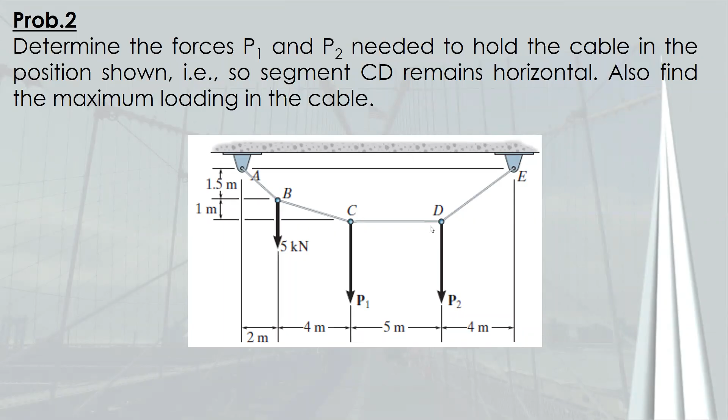Sige. So, these two case na sa previous na problem, we were able to solve for the reactions kaya ang forces ato given man. In this case, dili ta pwede. You cannot sum up moments of support and then solve for the other reaction because two forces are still unknown. Di ba? So it's useless to solve for the reactions.

So our focus now on this is on the joint with the known load. In this case, it's B. So, didto ta mag-focus sa joint B. Unknown ang tension sa AB o BC. Makuha mo na to ang direksyon na ni. Kaya given man ang slope o, 1.5 is to 2. And then, ang BC is 1 is to 4. So, with the given slopes, pwede ta mo-solve sa tension AB and BC. No? So, yung na ni siya.

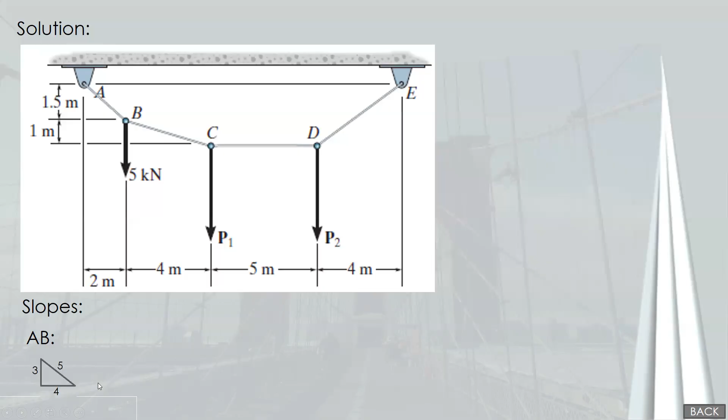First, kuha na to ang slope para diretso-diretso na. No? Sige. For AB, 1.5 is to 2. Kung whole number, that's 3 is to 4, diba? 3, 4, 5 siya nga triangle. Okay? Remember this. For BC, 1, 4. 1 vertical, 4 horizontal. And the hypotenuse is square root of 17. CD is horizontal na yun, no problem.

For DE, 2.5 vertical, 4 horizontal. So kung i-whole number, times 2 na siya. 5 is to 8. No? And hypotenuse is square root of 89. So every time mag-solve ta, mag-consider ta og joint, kanat ang gamit ha. Always remember the slopes. Sige.

For joint B, we have these forces. Now, tension kita na. Okay, cable man, dili mo design for compression ng cable. So, 5 ne, and then tension BC, tension AB. And then slope din ka. That's the slope for AB. Automatic 5 na. And then for BC, 1 is to 4 and then square root of 17 na.

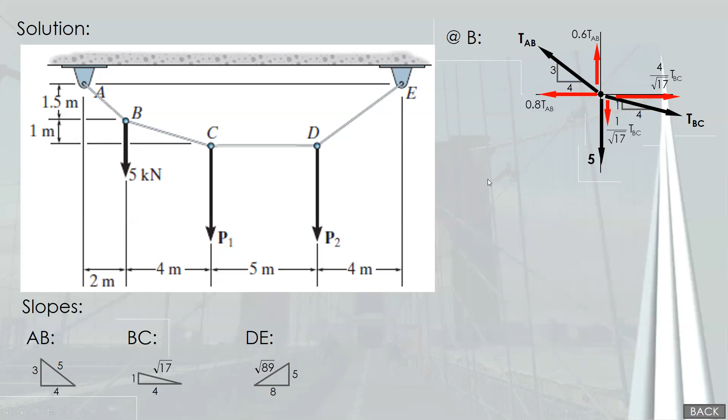Okay, so let's resolve the forces into components. So this one, that's 0.8, 4 over 5. And then the vertical component is 0.6. While for BC, that's 4 over square root of 17. And so vertical is 1 over square root of 17. And then sum up the force sa X. You have two forces. This one, no? And then for Y, upward and downward. So we have two equations with two unknowns.

Now, if you solve 1 and 2 using elimination, substitution, or calculator, when you use your calculator, be careful sa placement sa terms. No? Like for this one, BC ang una, and AB ang next. While dire, AB ang una, so you can interchange. Negative ang una, negative TBC, and then ang TAB. And the result is this. TBC is 10.308. TAB is 12.5 kilonewtons. Okay.

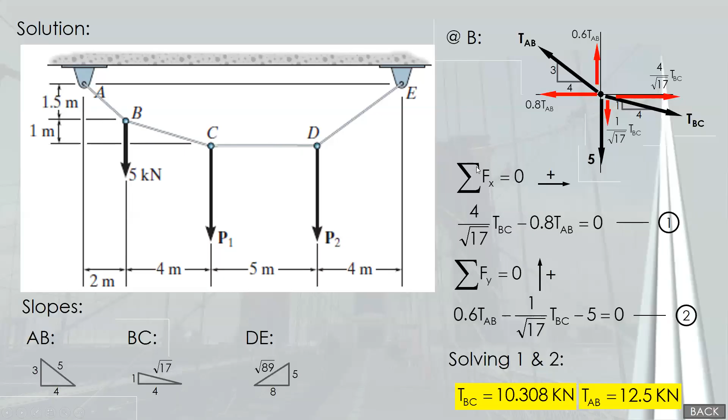Okay, so after this, nanakay TBC, di ba? Okay, you proceed to joint C. So, mo ni mong BC ha? And then CD is horizontal man. So, duha ang unknown. Tension CD and then P1. Okay. Use the same conditions. Summation of force sa X and Y.

So, kana, that's tension BC. And then, mo na slope niya. Mo niya components, 10 and 2.5. Okay, so sum up the force along X. TCD is equal to 10 kilonewtons and summation of force of Y. We now have the value of P1, 2.5 kilonewtons. So after this, proceed to D. This one, no? Nanatay CD, R na butas DE. So we have these three forces.

10 na siya. Tension CD, 10, 10, and then DE. Remember ang slope sa DE? 5/8 square root of 89. So, gana, and then components.

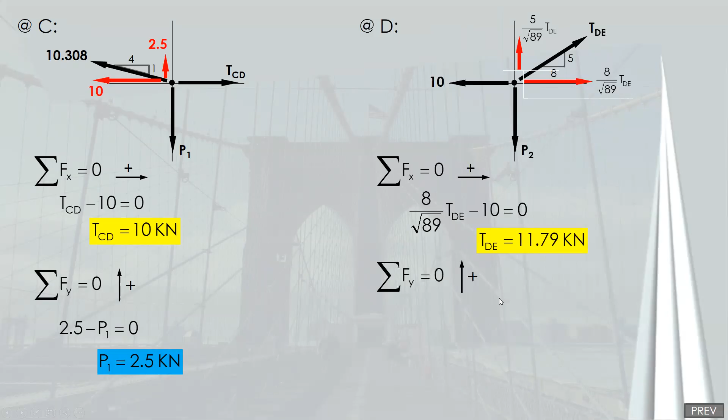Horizontal and vertical, and then sum up the force along the horizontal, and you have tension DE, and then summation of force of Y. You can substitute the value of DE. And na P2. So na-solve na ang values of P1 and P2 and the maximum loading, meaning maximum tension experienced by the segments. So ang CD is 10, DE 11.79.

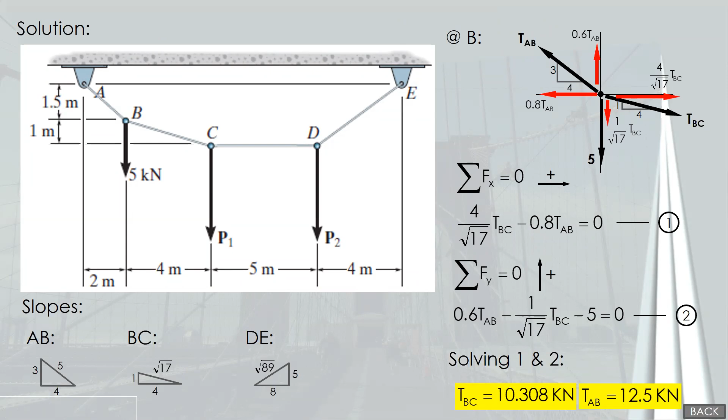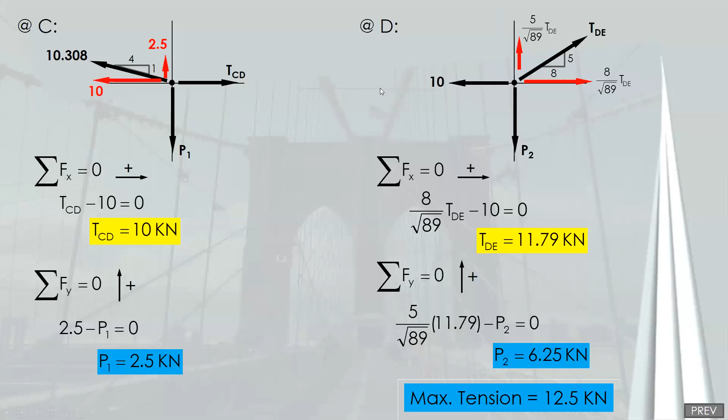Okay, BC is 10.308, 12.5. And I think this is the maximum, no? 12.5, the biggest one. Therefore, the maximum loading is 12.5 kilonewtons. Okay. So, ang pag-analyze sa cable with concentrated loads, dili siya procedural. You must look at the conditions and then kung ano saan given.

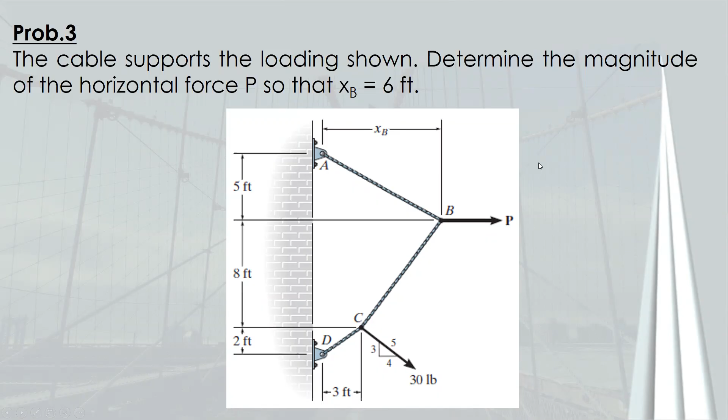The other problem is this. The cable supports the loading shown. Determine the magnitude of the horizontal force P so that XB is equal to 6 feet. So, kung 6 ni, okay. What's the value of P? No other condition, ha? Okay, sige. We'll replace this one by 6. So, like this, na 6 feet na.

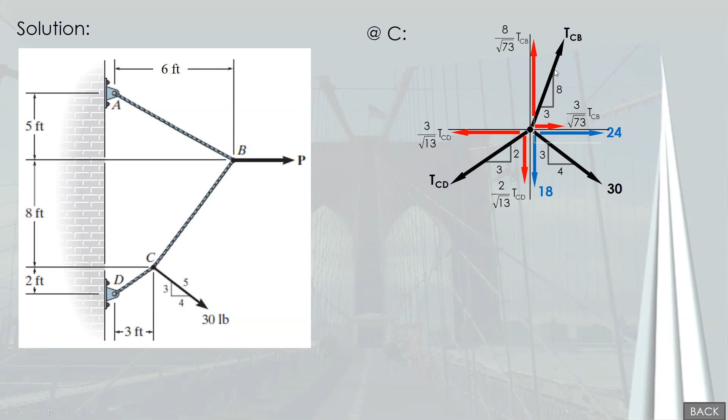So, like this, no? 24 kay 4/5 man, di ba? So, ang horizontal component is 0.8. 4 over 5 of 30, that's 24. And then this one, 3 over 5 of 30, that's 18. And then this one, horizontal is 3, vertical is 2. And then CB, horizontal is 3, square root of 73. Sorry. Three over square root of 73, and then vertical 8 over square root of 73 TCB.

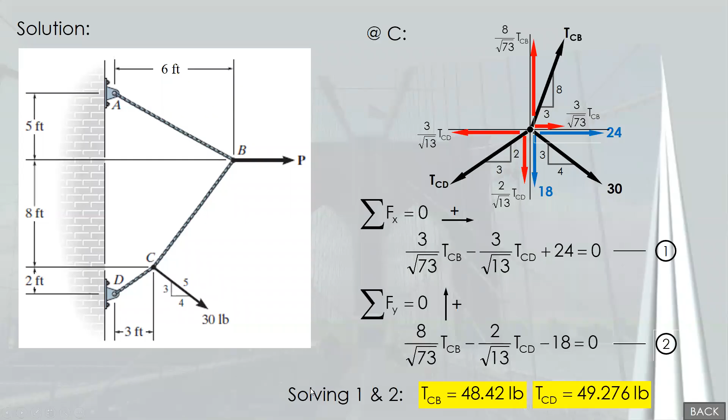And then summation of force X, 2 unknowns, summation of force Y, 2 unknowns again, second equation, and then solve equations 1 and 2. You can use your calculator, and you have these values, TCB and TCD. So you now have the value of TCB, no? TCB. You can proceed to joint B na naman kay value ani.

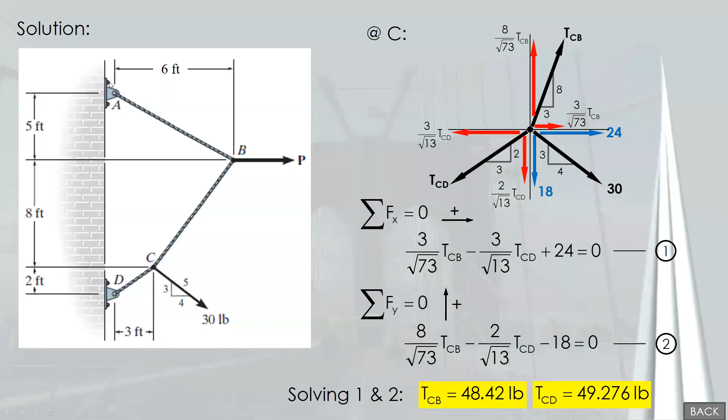So ang ano na po mo sa B, P na lang og tension BA. Na may slope ni. So okay ra. Okay? Sige. P and then kana 48.42, no? Tension CB 48.42, and then tension BA 5:6. And then components 17, and then 45.34. This one for BA, and then vertical components for BA.

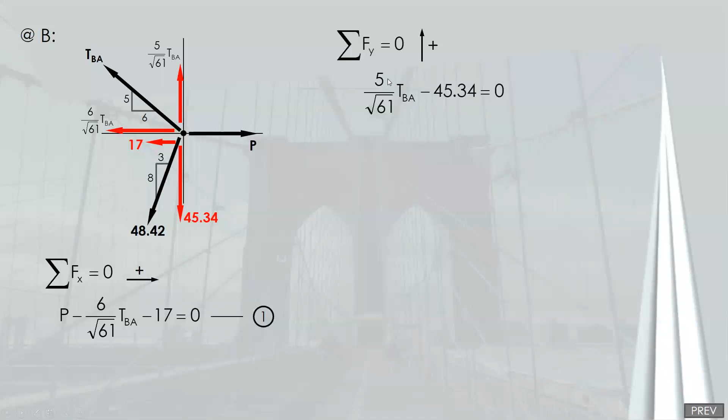So summation of force X kana duha pa ka unknowns, di ba? So that's equation 1, and then summation of force Y. You only have 2 forces, so makuha ni mo ang TBA. And after that, substitute ni from equation 1. And then na kay P na 71.4 pounds. Kana lang.

So, every time mong solve kag problem sa cables with concentrated loads, analyze sa daan ako. Asa ka pwede mag-start. And if there are forces na unknown, normally dito ka mag-start sa joint na given load. Okay. Or basta for as long as you only have 2 unknowns. Di mo ka pwede sama pag-moment kay concurrent man ang forces. Magtagbo sila tanan ba. Every time mo analyze kay joint, magtagbo parehan yo. Concurrent man tanan. So dili ka pwede mo sum up o moment.